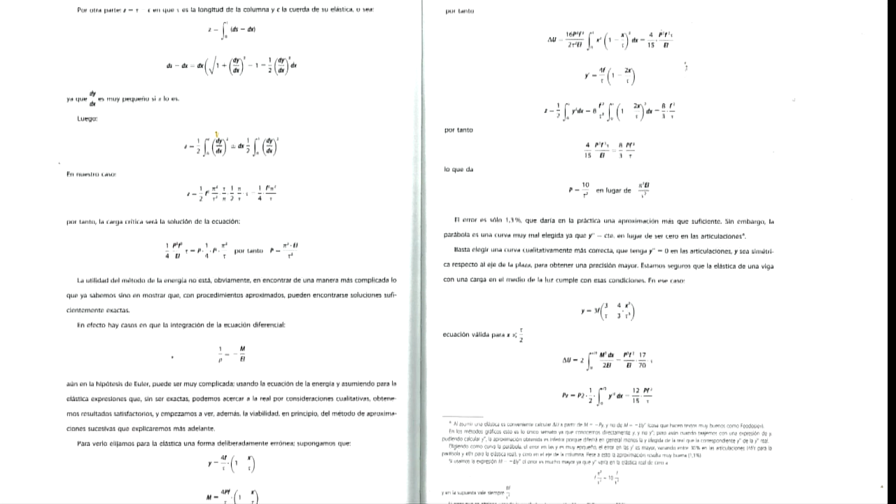But in 2003, I went to Sao Paulo, and I was exposed to an Uruguayan engineer - you see, there's hope for engineers - called Eladio Dieste, who died in 2002. This book was for architects, because it's fat and has lots of pictures, and this book is for engineers, because it's thin and full of this kind of stuff. It took me eight years to find this book because I'd hidden it somewhere. The reality is this guy had been designing buildings from the 1940s until he died in 2002 in Uruguay. I went on a road trip with a friend of mine for 600 kilometers across Uruguay, which to be fair is only about the size of this hall, maybe not quite as big.

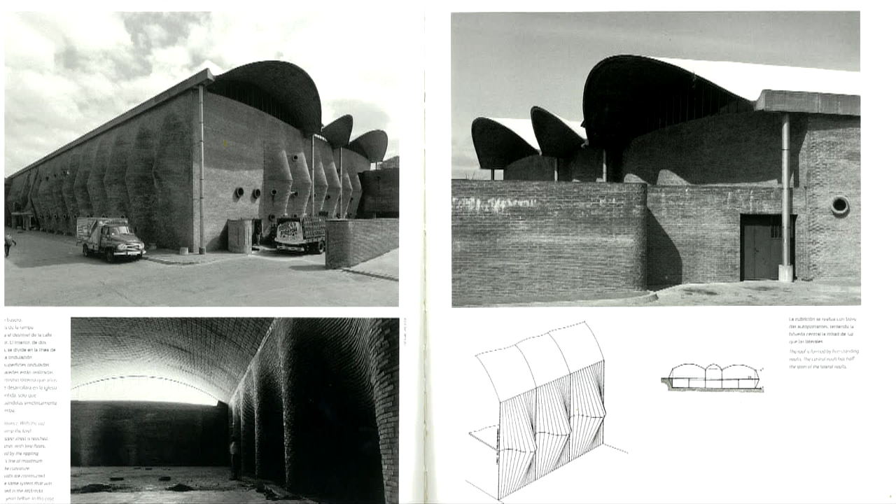So he was designing these incredibly beautiful buildings. If you consider this is a shopping center, and think about shopping centers now - shopping centers are nothing more than billboards to hang marketing off - and this building is still around today. I went to have a look at it. It's still around, and it's really, really beautiful, and it's completely mathematically designed.

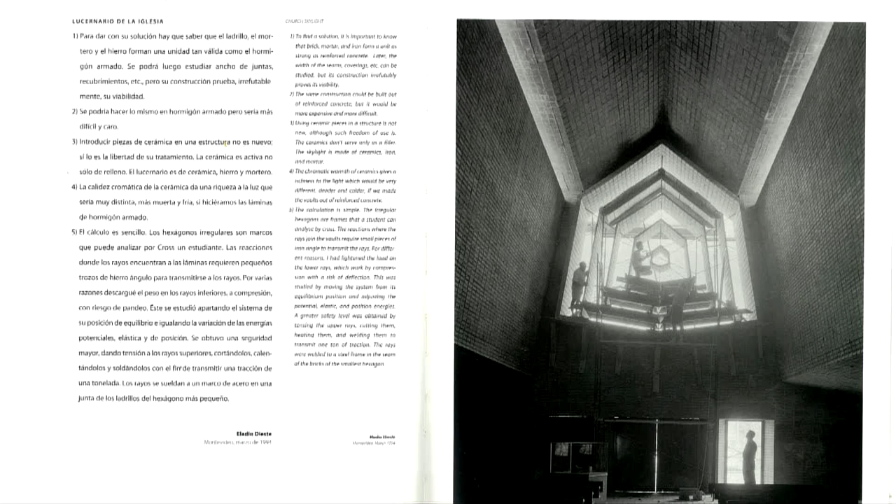This was a church in the middle of Uruguay. The transept had burnt down, and if one considers that this is made entirely from brickwork - that's what it looks like now, these are photographs I took. This guy just had calculations; he didn't have fancy computers and all of that sort of stuff. It's incredibly elegant.

What I thought was kind of hilarious is this church is about 40 kilometers from Montevideo, and there was a nun who was very pleased to see us. She asked me where I came from, so I said South Africa. She thought that was amazing, and the fact that I was white. So I said to her, 'You don't seem to think it's weird that you're South American and you're white - so your white is different to my white?'

Whatever. Anyway, these are more of the buildings that he had done - again, all mathematically designed, not with computers. This is a bus station.

So this friend of mine, we drove around all over having a look at this stuff.

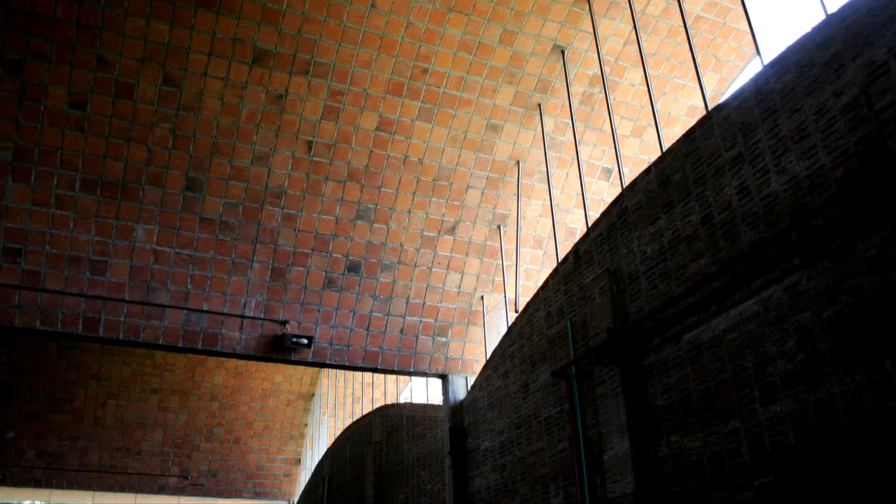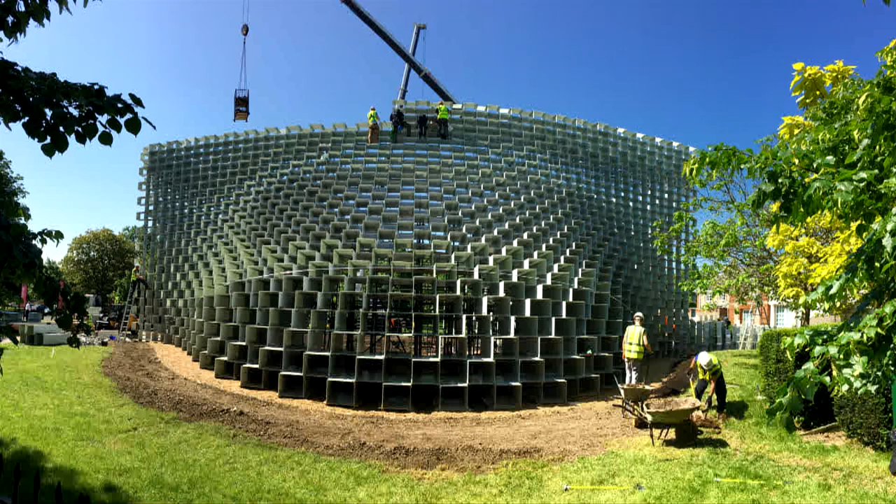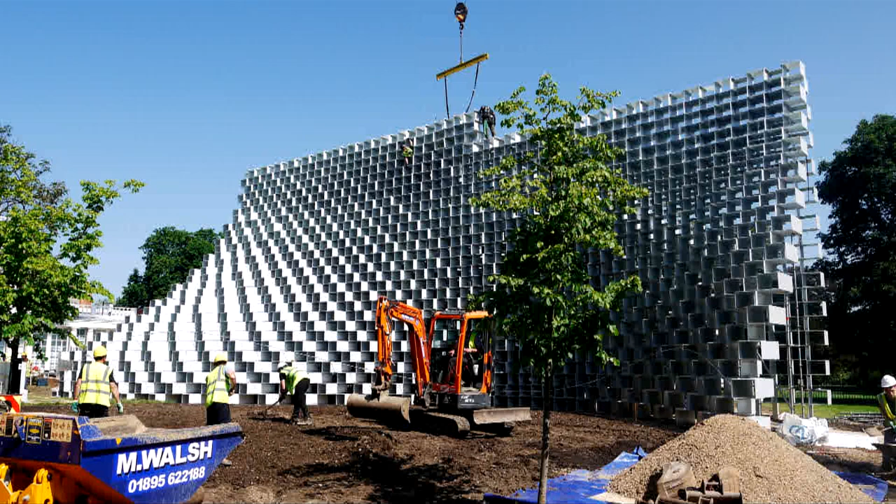If any of you have been to London in the last couple of weeks, you would have seen the Serpentine Pavilion, which is erected every year in the middle of June and comes down in the middle of October. It's up for 3 or 4 months. Some world-famous architect gets asked to design this pavilion every year. I think it's my turn next year, or the year after, I can't remember. This was the day before it opened, but because the British are so polite, you can walk up to the building but you can't go into it. The sun was shining, but that was our allocation for the year.

It is designed by a guy called Bjarke Ingels, a Danish architect, very pleased with himself.

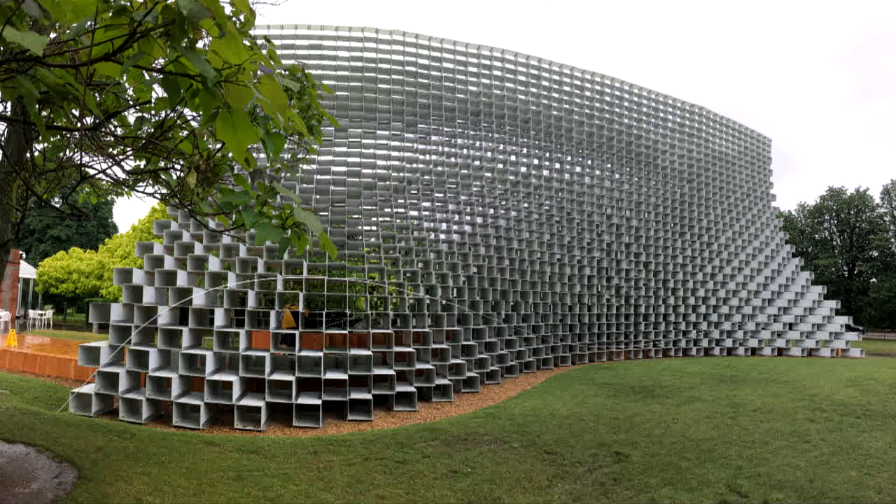I went back 2 weeks later because I'd been to New York in the interim, and of course it was raining, of course. What's interesting about it is it's an opportunity for world-famous architects to put up a structure that's not intended to be there for very long, so you can take liberties you would not be able to take on a house or any other building. What's interesting about these buildings is that in many ways they're a gestation, a petri dish, for how we think things are going to be in the future.

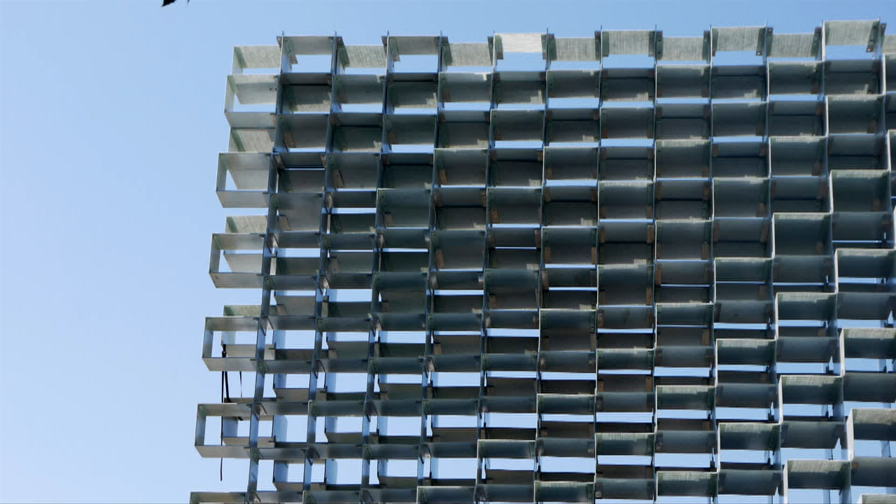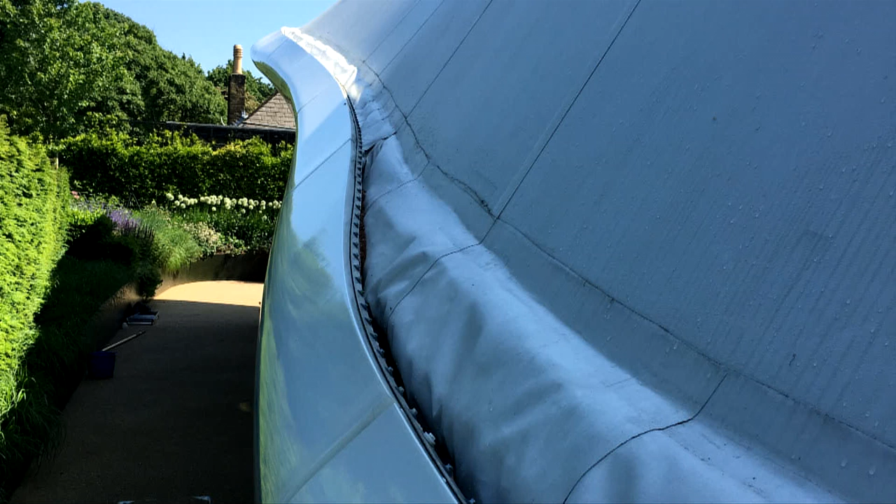And then again, I'm sure you know about the Tate Modern Gallery, and this is the new extension that was opened about 3-4 weeks ago by the very famous Swiss firm Herzog & de Meuron. What's interesting about this building is every single one of these bricks would have been modeled in the software that we're using in architecture now. And the best part of it is any housewife or house husband can go home, download this stuff, design their own house, and then phone an architect and say just build it, just draw it.

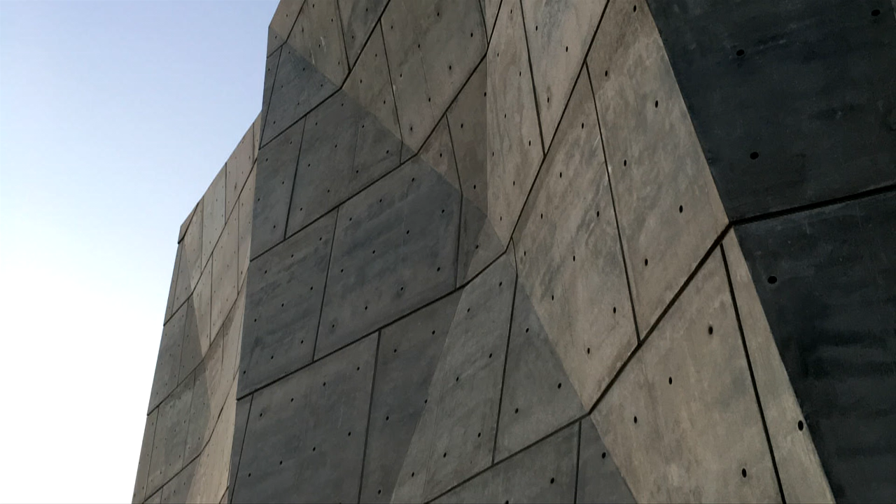This is in New York. It was a sanitation building, just dealing with utilitarian tasks. But I like the way they had actually put a bit of effort into it, and the form making is quite beautiful. That's also out of sequence.

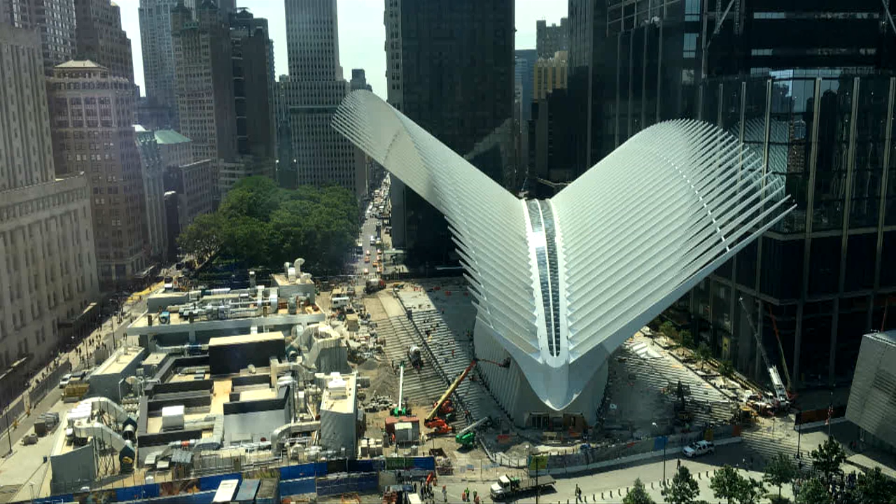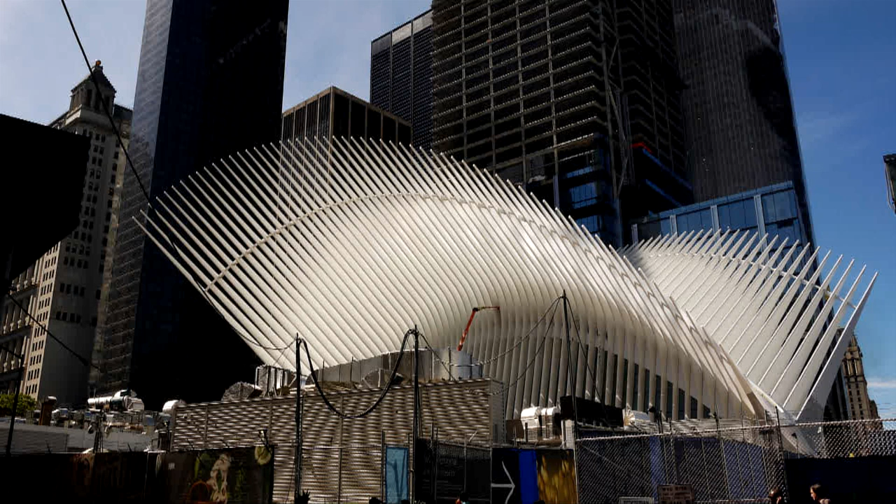But yeah, it's kind of interesting. These kinds of architectural elements, it's only a matter of time before they filter down through the buildings that as regular people we occupy, into our own houses, and the impact that technology is going to have. I mean, we already have talking fridges, so.

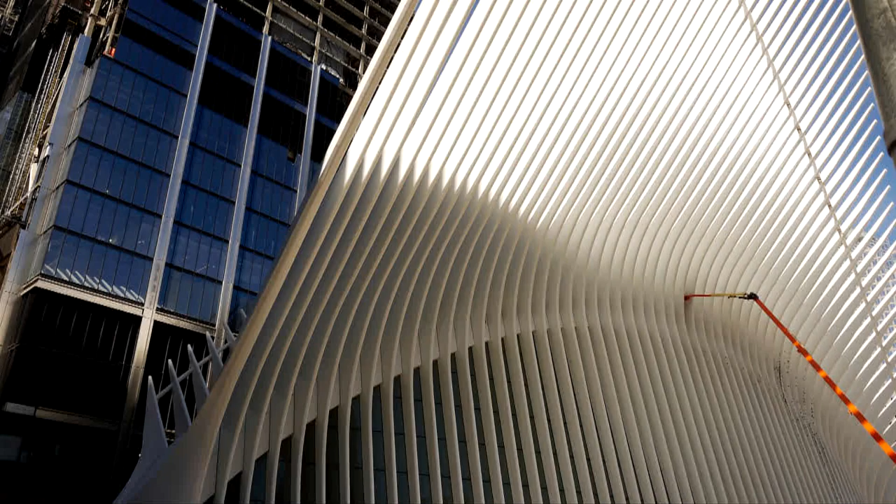This was the rest of the...

Zaha Hadid in 2008 designed one of the most famous parametric modeled buildings in the world. It was in Austria, because the nice thing about being Austrian is you can afford these types of buildings. They built four railway stations: one in the town, one on the edge, one halfway up, and one at the top. This building's been around for a while.

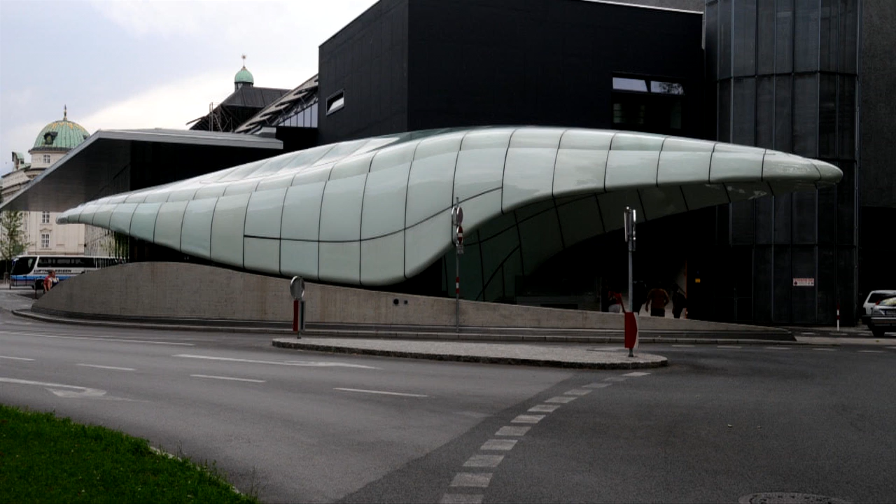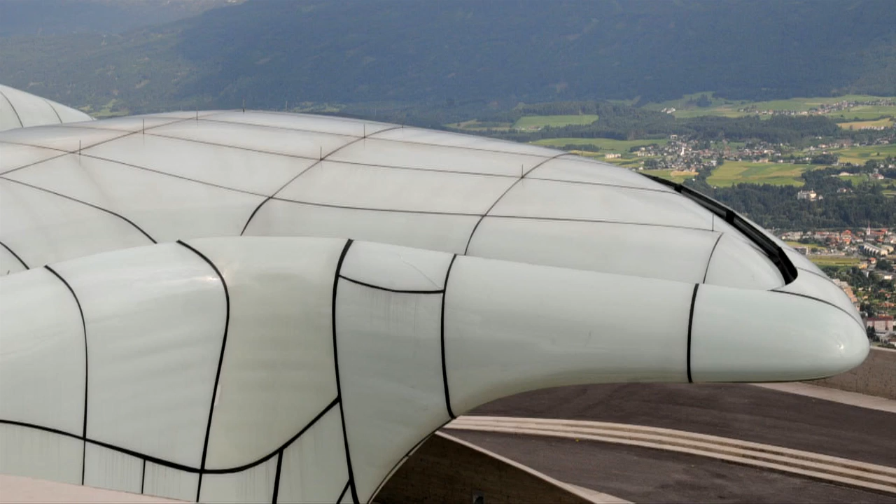I visited this building eight years ago. What's interesting is when you visit it for the first time, your initial reaction is, what does this mean? What is the relevance? Do I like it? Don't I like it? As time passes, you start to see how, whether you like it or not, it starts to have an impact on your life. When there's something new, you either want to be the first person or the best person. She was definitely one of the first, and possibly one of the best.

So are computers the answer? I just came back from Sweden, and this is the library of Gunnar Asplund, a Swedish architect who died in the 1940s. Again, obviously no computers, no mathematical modeling, and it's a really, really beautiful building. The Swedes don't have much to do with their money either, so they're big investors in architecture.

And then the Sydney Opera House, which was built during the 1970s, but again, built without computers, built with mathematical modeling.

It's the same with architecture. What's the purpose of computers if they're not making our lives better?

I'm not going to spend time on this because it's very technical, but these are the ranges of computers and computer softwares being used in architecture at the moment. I doubt even someone as brilliant and skilled as I know more than one of these - probably Outlook. So this is the stuff going into designing our buildings, but is it making our lives better?

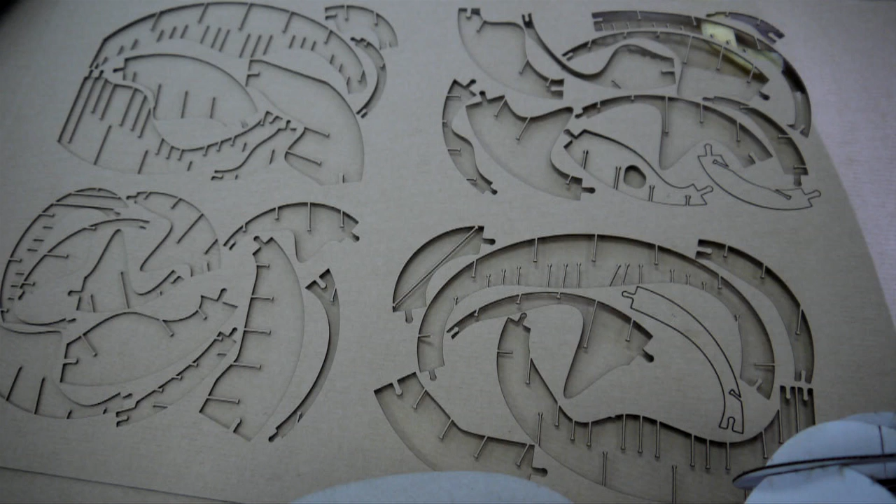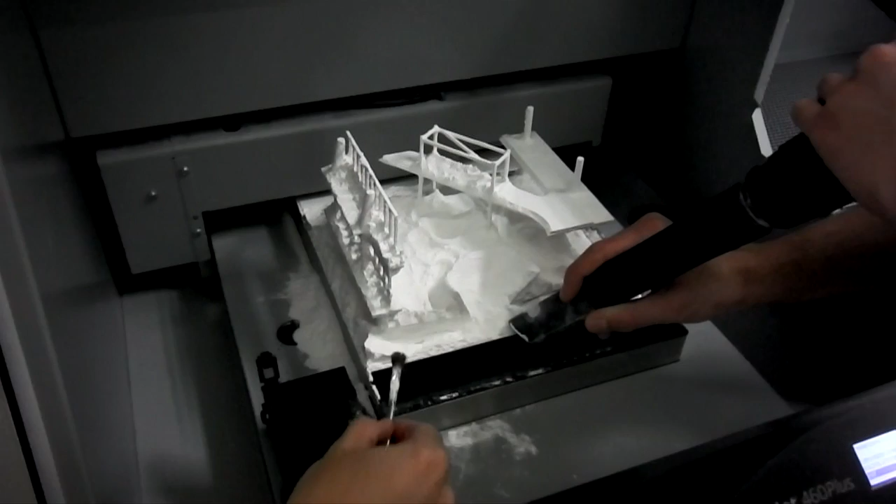I ran this course at Wits a couple of years ago, and we've gone into 3D modeling as well. But Wits is a bit like a government department - they spent R1 million on the machine, didn't know how to use it, used it three times, and now it doesn't get used at all.

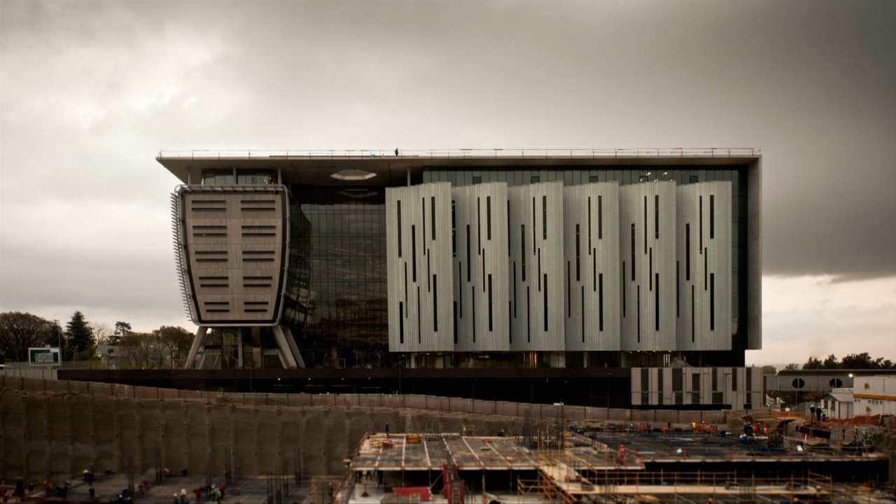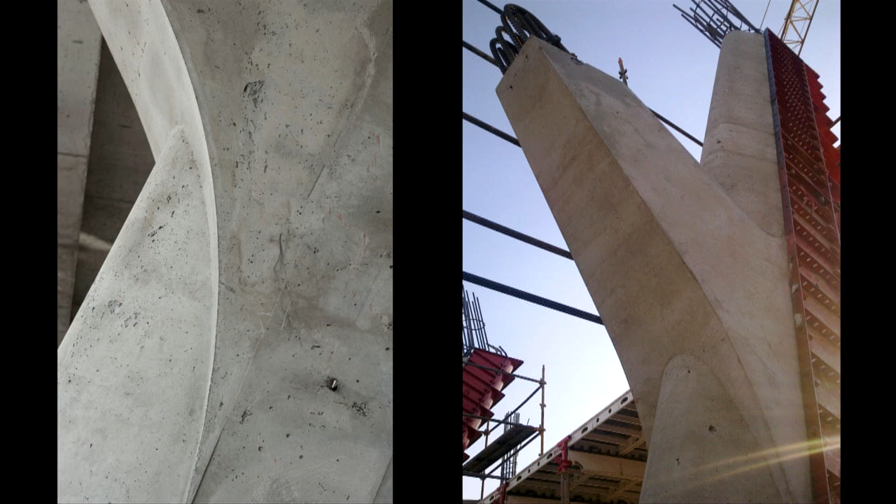So these are some of the buildings that the firm I work for has done. You might well recognize this one - it's opposite the Gautrain station. It was the advent of computers that allowed us to start designing things we couldn't do before, and also save money in ways we couldn't have done before.

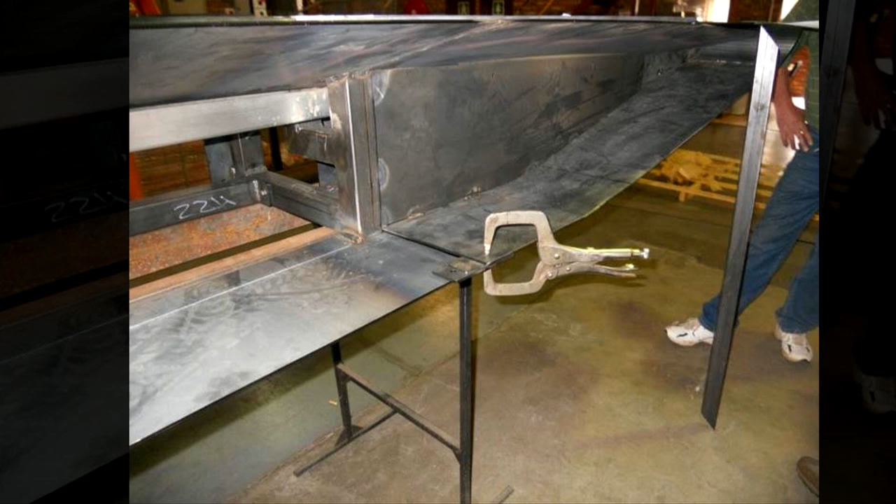It's got to the stage - these are the hand wash basins we're doing now in the Sasol building - where we generate images so perfect that it's difficult to tell if it's a render or an actual photograph. In my job, I have people phoning us up, usually from advertising agencies, asking to use a building for a Mercedes shoot. I say, yeah, but it hasn't been built yet. They say, yeah, no, it has - I saw it online, which must be real because it's on TV. We generate renders so hyper-realistic that people think they're real, and even I, who works with them, sometimes get fooled myself.

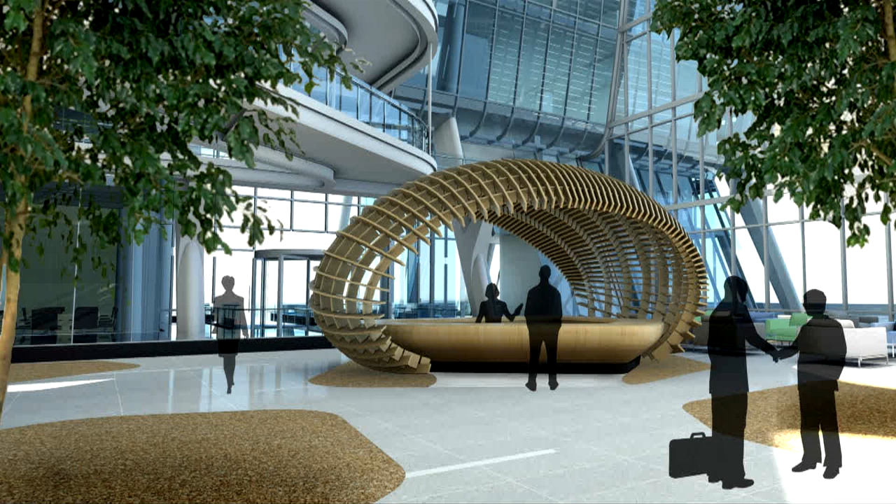This is the Alexander Forbes building, which had so much light that we had to design this pod. We had to monitor the movement of the sun to work out how to shade the people.

But anybody now who commissions a house from an architect, there's a 100% chance that building will be drawn on Revit. What's amazing is you can punch in your latitude, longitude, and days of the year, and it'll simulate all the activity.

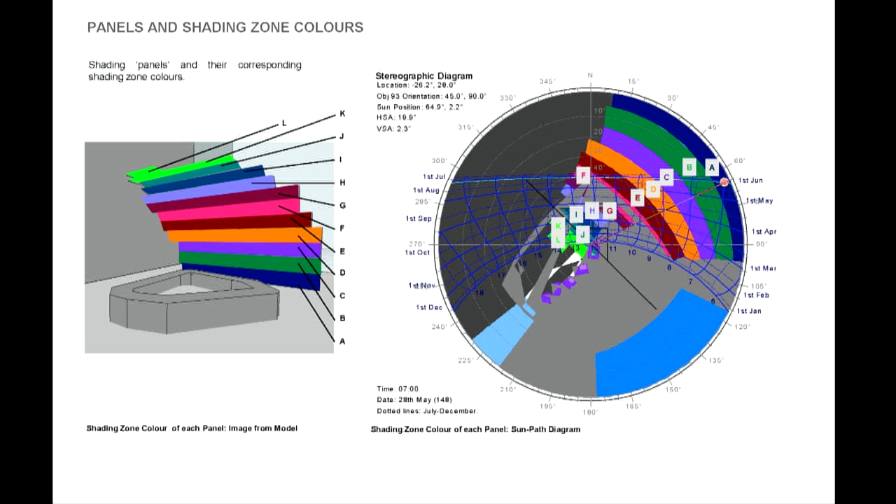I'm not telling you anything new, am I? You can simulate the sun at any day of the year, and design accordingly.

Buildings have elements where parts can move. We know that in winter the sun is much lower, in summer the sun is much higher. So how do you deal with that in a building? Do you have movable screens? Do you have things that slide? Do you move within the building, do you change positions? How we occupy our buildings becomes very relevant.

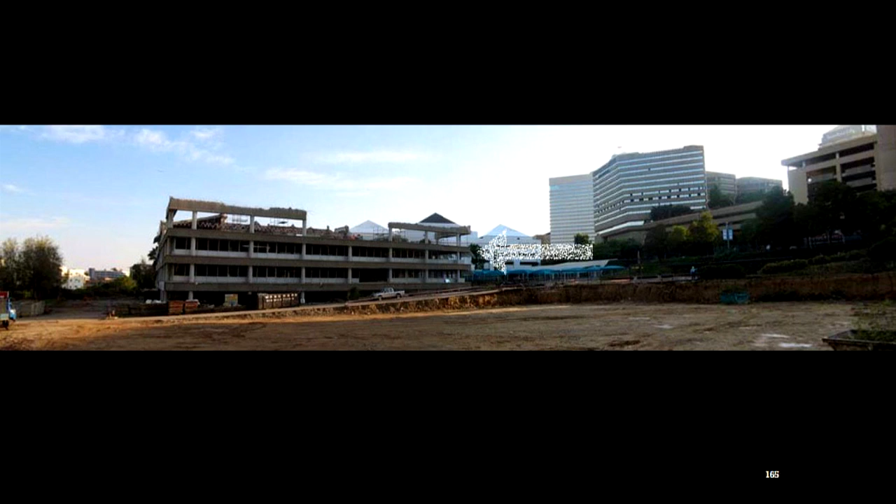This is the Alice Lane building we did, which was initially a renovation. What's interesting is this building was built around 2008, and the last building will be finished in March of next year, so it's just over 8 years. What's quite extraordinary is how the technology has changed in those 8 years, even for me, a Luddite.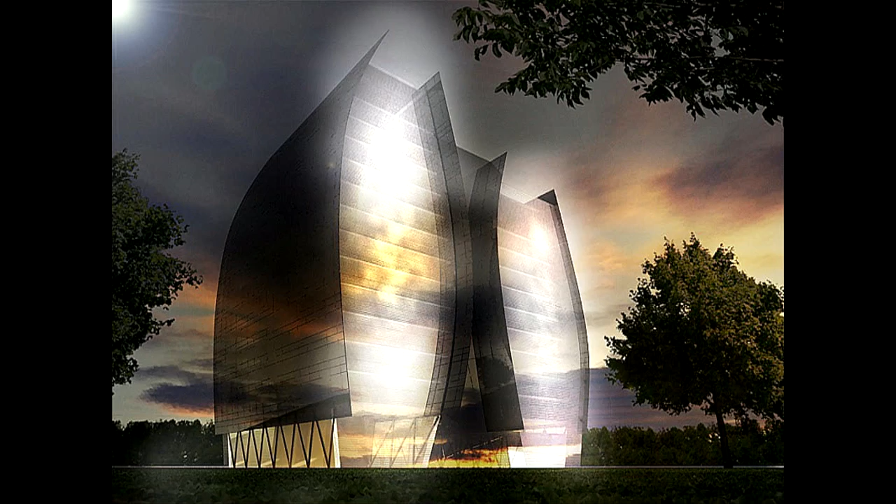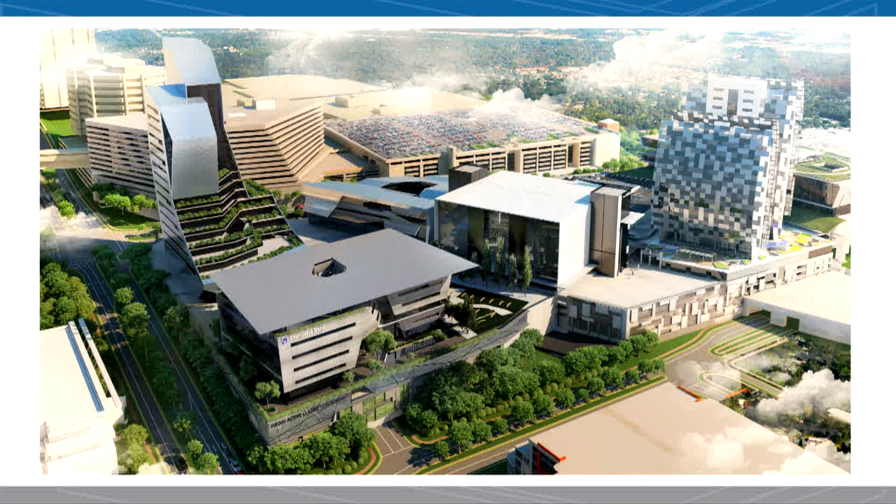The one thing computers have done to architecture is it means we can move much faster. The bad thing is that our clients know that, so they're either asking you to change all the time, or they're asking you to give them 50 variations of the same thing, without paying for them either.

This is the flagship for Virgin, the gyms. In fact, I took students here while it was under construction. There were about 60 students from Wits, and we walked around the corner and walked slap bang into Richard Branson. I don't know who was more excited to see whom. He's such a showman, he was like, oh my God, I've got 60 students to impress. And then there was them, like oh my God, it's Richard Branson. It was like a mutual backslapping association.

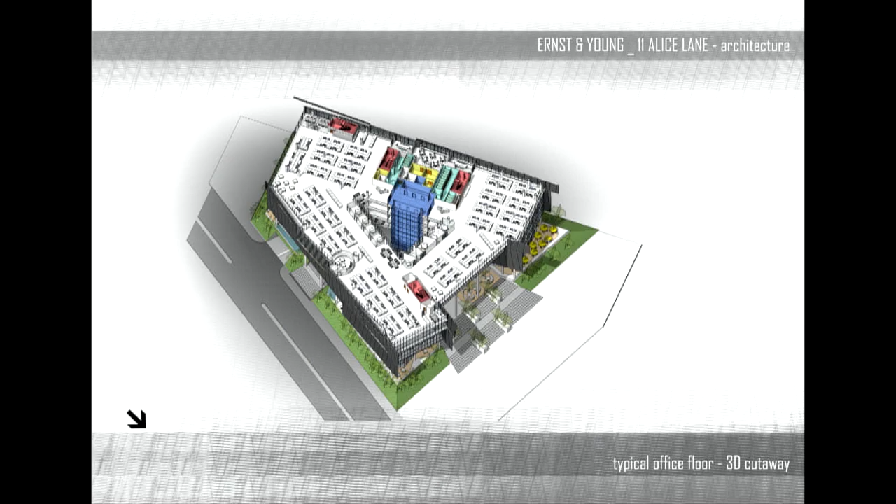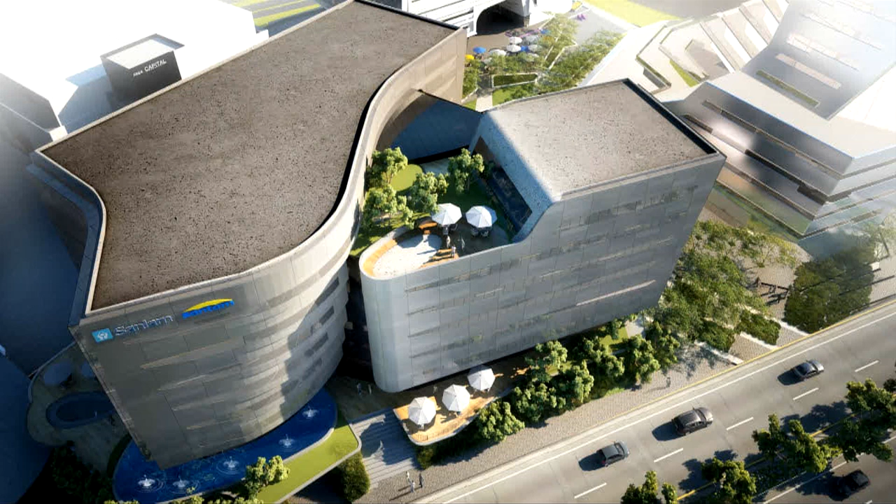I'm not going to get into the technicality of this, but all of these buildings have been modeled on computers, both for form and function, but also to respond to the climate. All of these windows have been measured for the amount of light they allow in and the amount of heat that goes out, so it's this constant fight between light and heat.

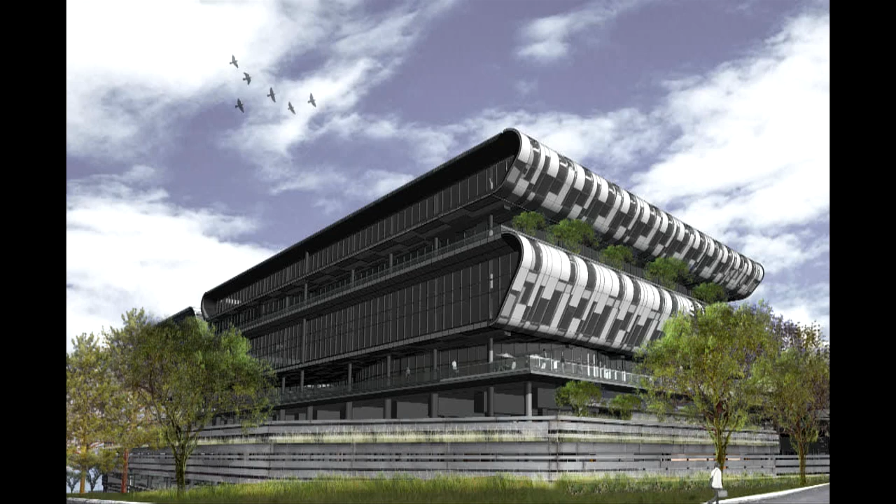We did have one student working on these dots, but he worked on them for about 3 months and then never came back. It's aluminium, it's a tree, it's an image. That's the other thing, the use of graphics that get translated onto buildings. It's an aluminium frame, skin.

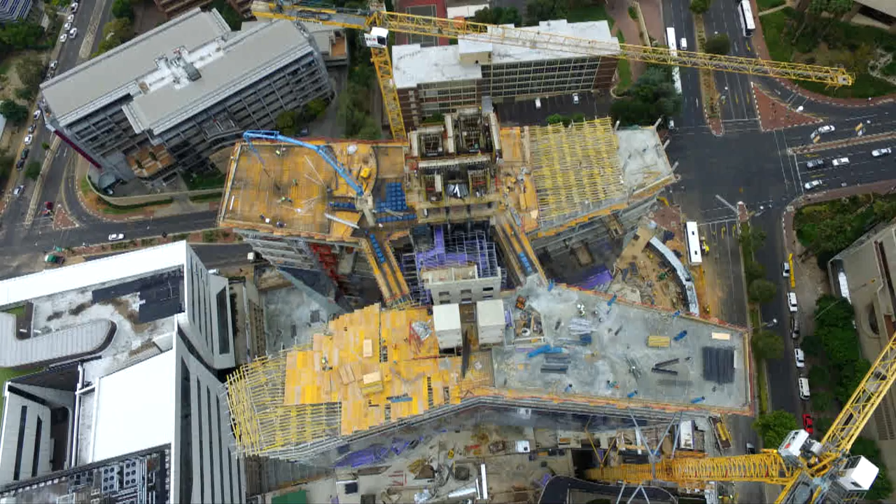So this is Alice Lane 3, which is currently under construction. We clearly didn't learn our lesson the first time, because this is all glass to reduce the amount of electricity used to generate lighting. But it allowed in too much heat, so we put these dots, called frit, onto the glass.

We found out later that when the pattern was very regular, it was very disorientating to the human eye, so we had to change the pattern from quite big in the middle to quite small at the edge, and we had to do it by hand. We had these 3 architects in the office who threatened to resign. So we had to pay 300,000 rand to some company to generate an algorithm. We clearly didn't learn.

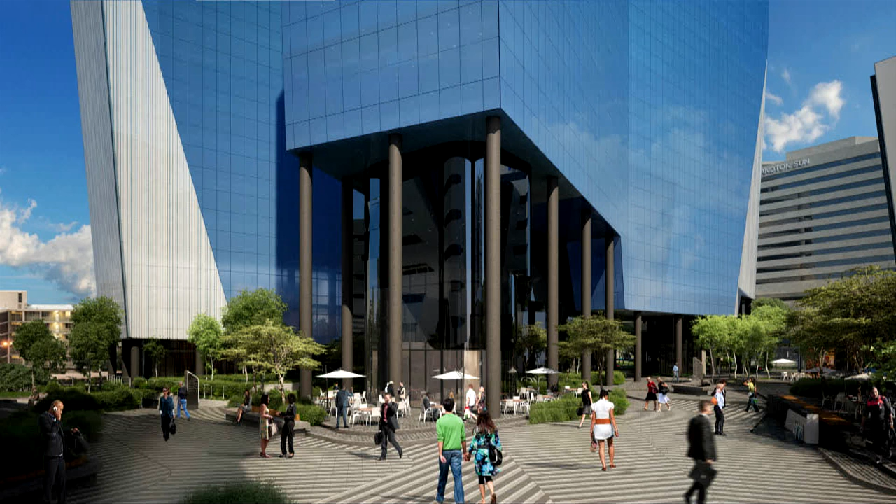What is interesting about this development is once it's finished, the spaces between the buildings are going to be much more user-friendly. They're not necessarily going to be public space, but at least better than Sandton City, designed on a Canadian model because our weather is so similar. Not.

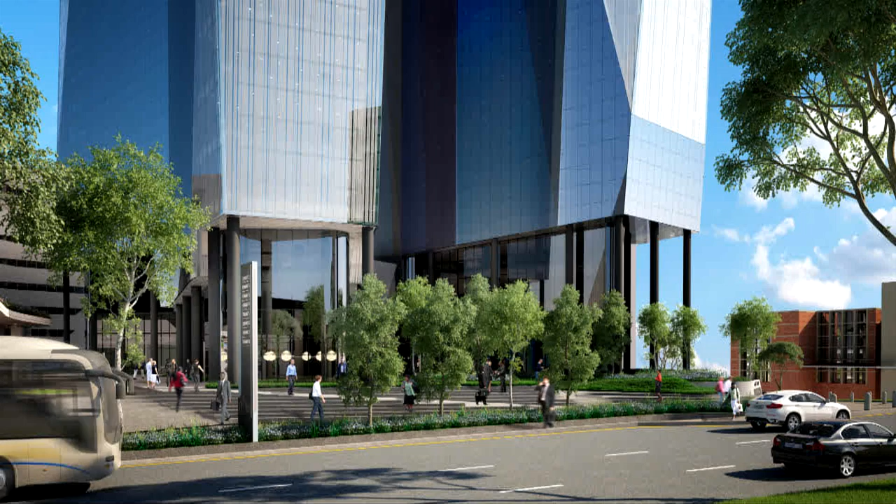So all these spaces, where's Sandton? Sandton City is here, and all of these spaces are going to be kind of public spaces. That's what it looks like now.

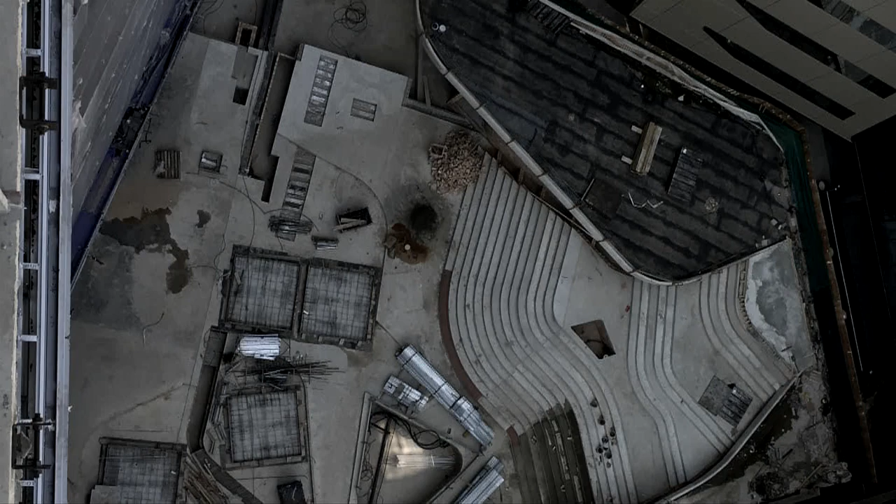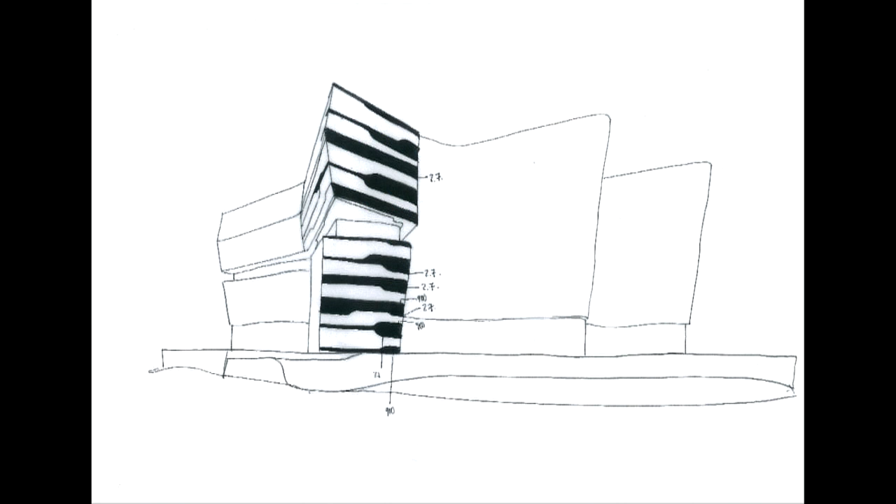The Sasol headquarters will be finished next month. They're moving 14 buildings from Rosebank into one, with 2,500 staff members moving in. Everything we learned before is being included in this building, so all the planting is going to be indigenous, and they started growing it about a year ago. Sasol's extensive art collection has to be included as well.

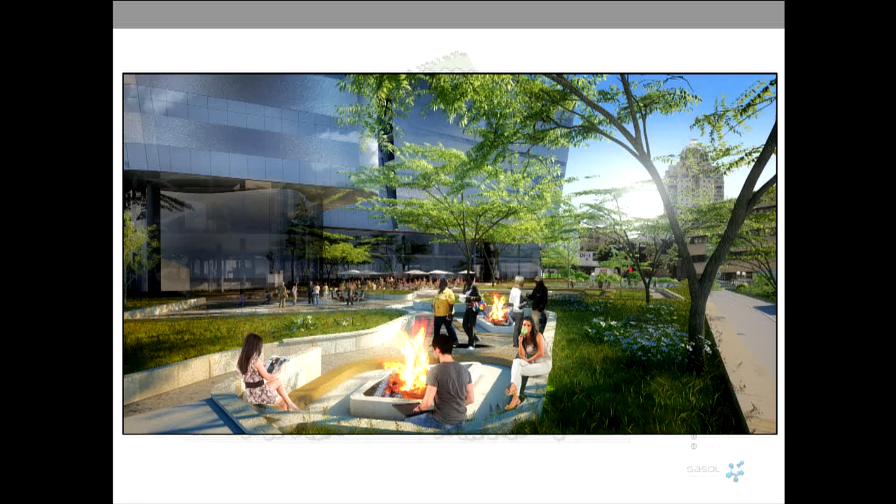What I love about corporates: they're not providing any smoking facilities because they needed to get their Green Star rating. So if you want to smoke, you're going to have to walk to the bottom of the garden. If we learned anything from Alexander Forbes, a third of their 700 staff members smoke, so we fully expect a third of the 2,500 people working here to smoke. You can expect to see well-dressed women smoking soon after they move in. There's no fire pit, sorry, the quantity surveyor got hold of that.

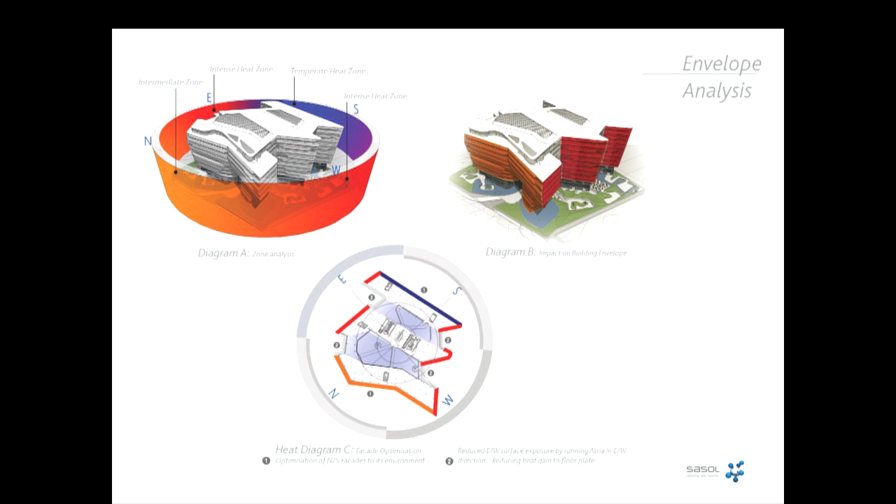But the whole building has been modeled on sunshine. Where the building casts a shadow on itself, there's more glass. And where there's more sun, there's more spandrel panel.

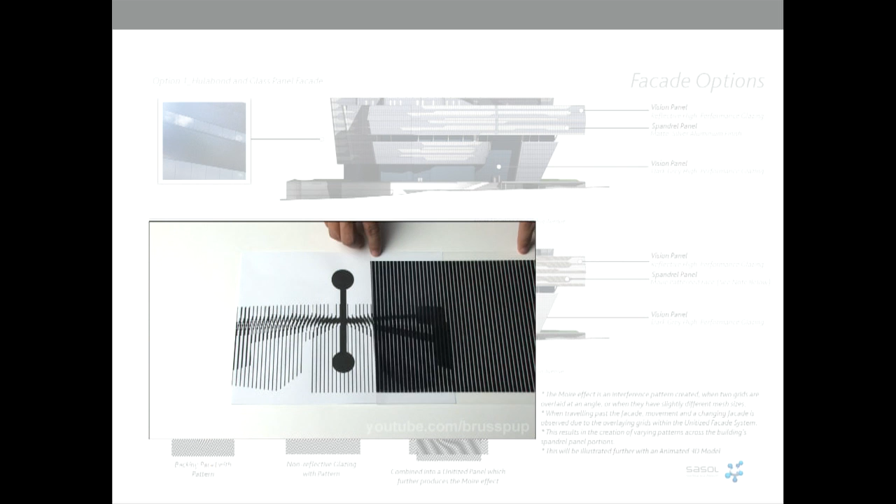At one stage, we were going to have this moiré pattern on the glass because it's double glazed. If you printed it on both surfaces, as you walk past, the pattern would change. But I think once again, the quantity surveyor got hold of that, so we lost out on that.

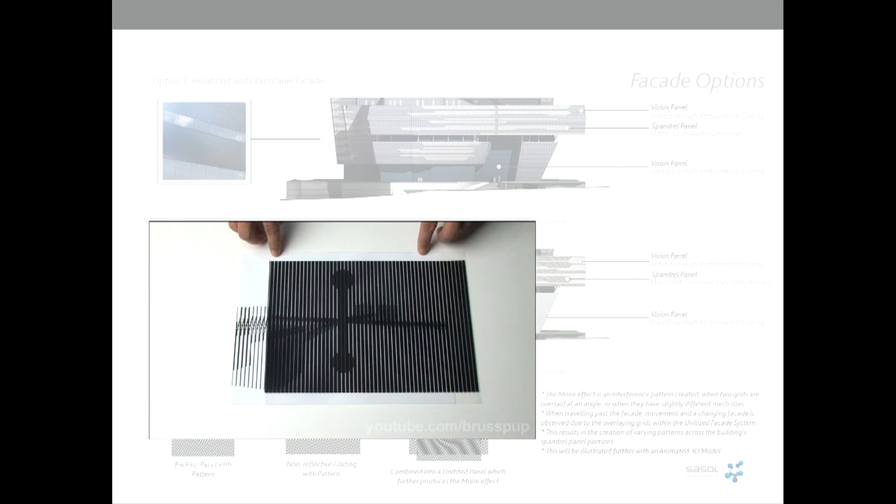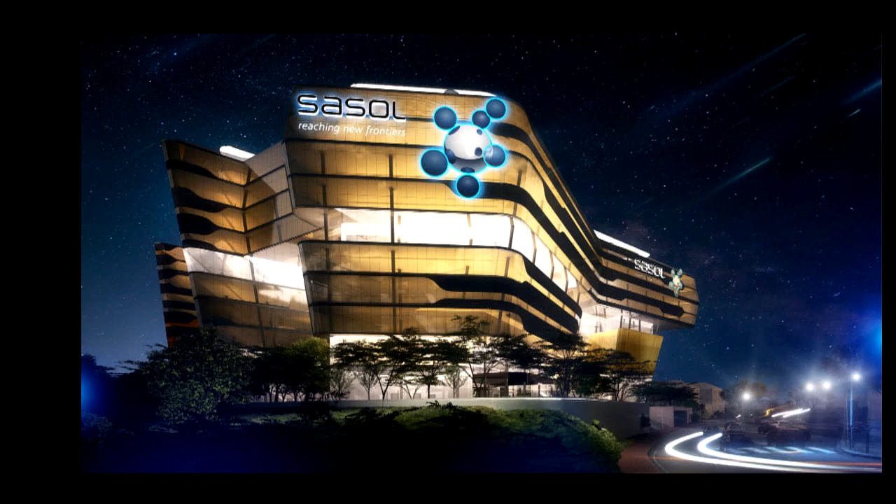But again, all of the lessons that we're learning on these buildings are ultimately going to filter down into houses, community centers, and more community-type buildings.

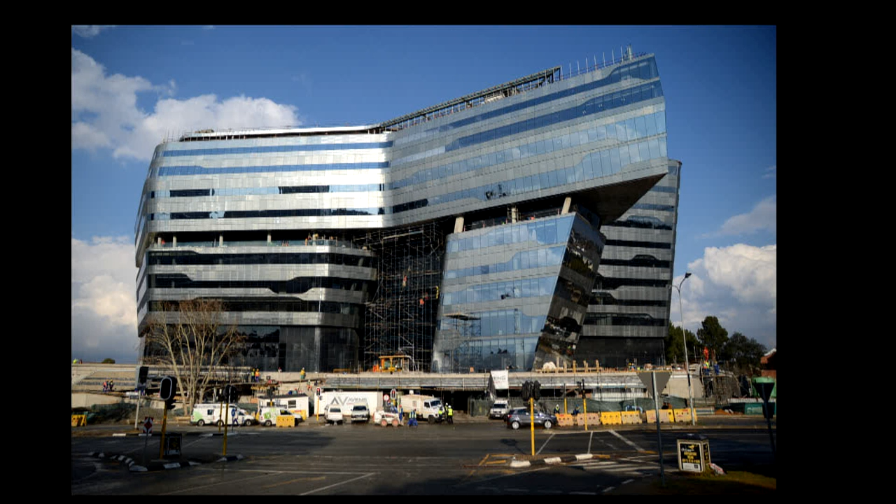That's what Sasol looks like now. They've actually got the Ghostbuster team to start cleaning the windows and taking the plastic off the building.

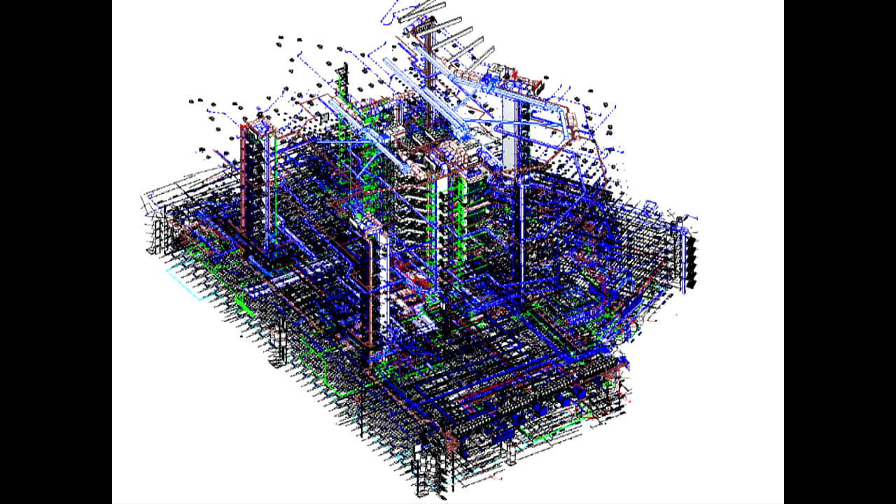Because our buildings are so technological, there's one person in our office who only works on clash detection - clashes between electricity and water, or structure, or technology, or communications, and that's all they do. It's only a matter of time before our houses are like that. With Wi-Fi and the talking fridge, that's going to happen as well.

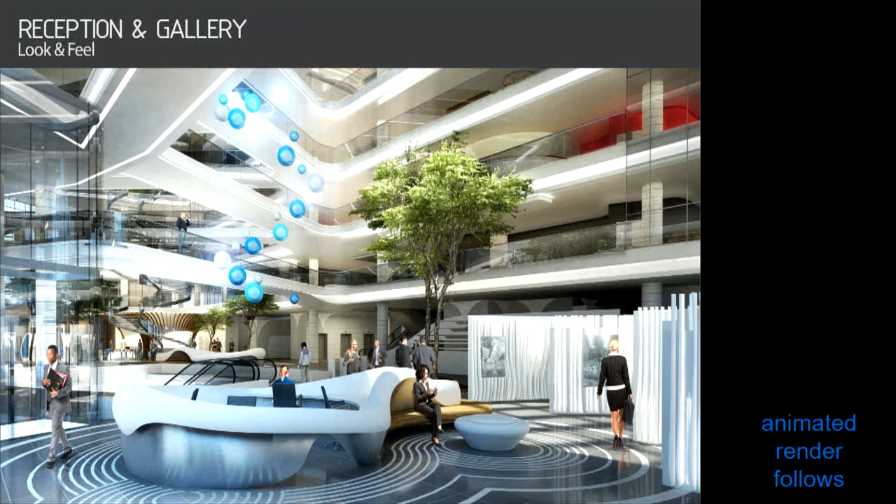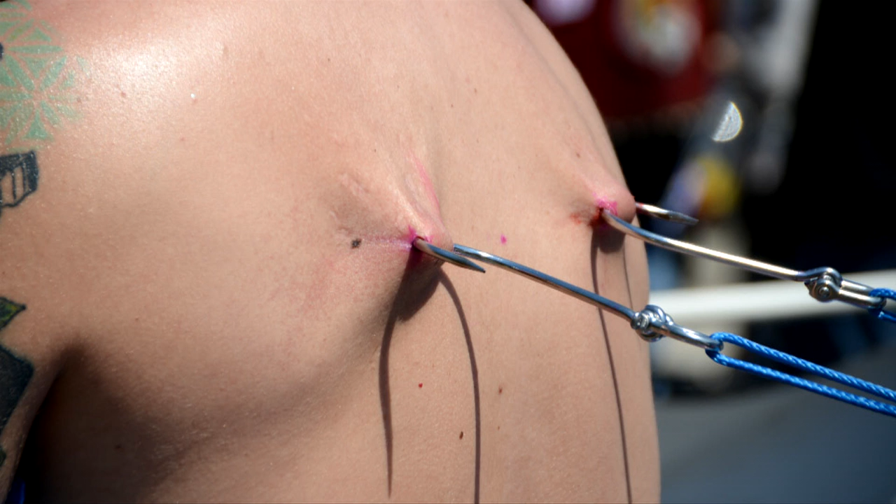So it's really, really important that we maintain the human skills, because otherwise, life is just going to be a drag. It's important that you look left, you look right, but mostly look both ways. Thank you.

Yeah, no, it's a very valid point. Because Sandton was designed for a couple of farms and then a few, it's not something that as architects we necessarily- it's part of our job, but ultimately the city planners, it's a problem. I will concede, it's not only the services. By the time as architects we get involved, we're quite far down the food chain.

But traffic, I do know that they're making big inroads on traffic. But services, it's a problem. Look, I work for a very large firm, and the reality...